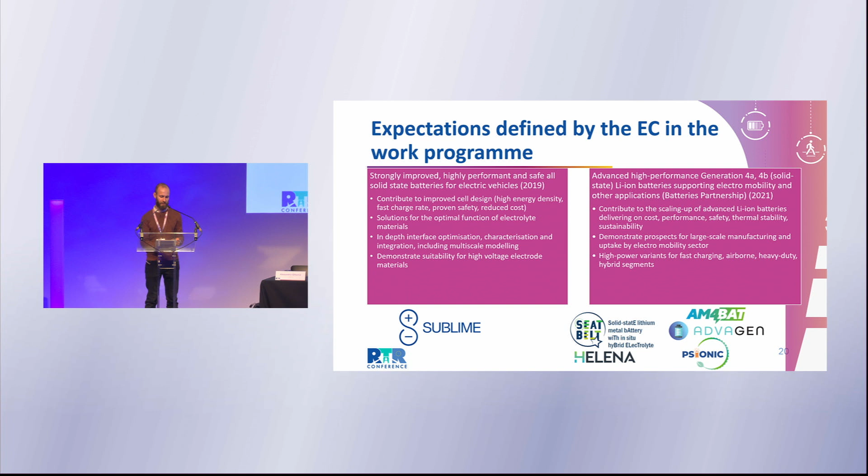There are two topics in particular that address solid-state batteries, one of them being the strongly improved, highly performant and safe all-solid-state batteries for electric vehicles, under which the project SUBLIME was funded. It responds to the needs of the EU for improving the cell design, but also to provide solutions for the optimal function of electrolyte materials, to demonstrate suitability for high voltage electrode materials, and to contribute to interface optimization, characterization, and integration, including multi-scale modeling.

And then there is another topic under Horizon Europe, under which the projects SEATBELT, HELENA, ADVAGEN, and PSIONIC were funded, which aims to advance high-performance generation 4A and 4B all-solid-state lithium-ion batteries, supporting electromobility and other applications. The aim is to improve the design and performance of lithium-ion batteries, delivering on cost, performance, safety, thermal stability, sustainability, but also to demonstrate their potential for the electromobility sector, and to provide high-power variants for the fast-charging, airborne, heavy-duty, and hybrid segments.

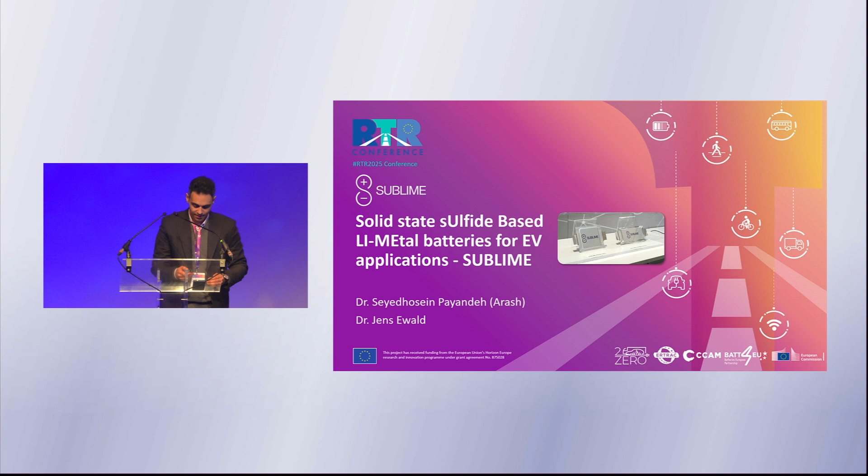There were parties for making materials, parties for fabricating cells, and the automotive industry was also involved at the end to evaluate the cell performance. The aim of this project was to make an all-solid-state battery. It was a very challenging project, starting with high nickel cathode materials, nickel content above 80%, to be compatible with state-of-the-art lithium-ion battery technology, with a lithium metal anode to boost the energy density of the cells, and with a sulfide solid electrolyte.

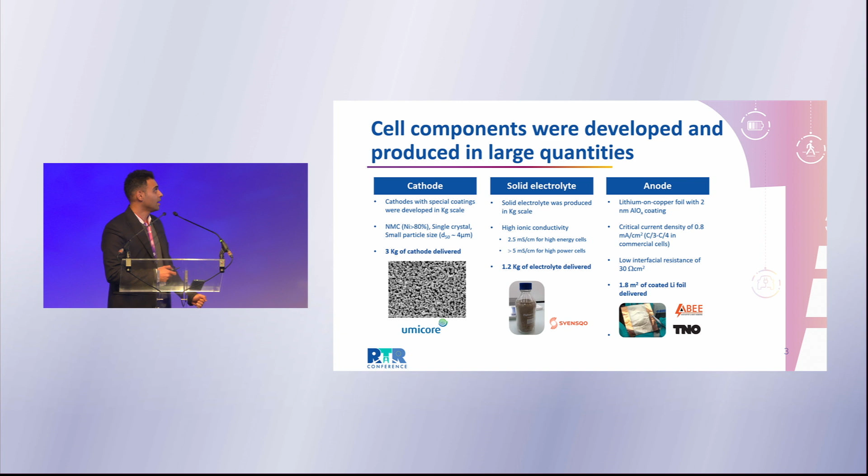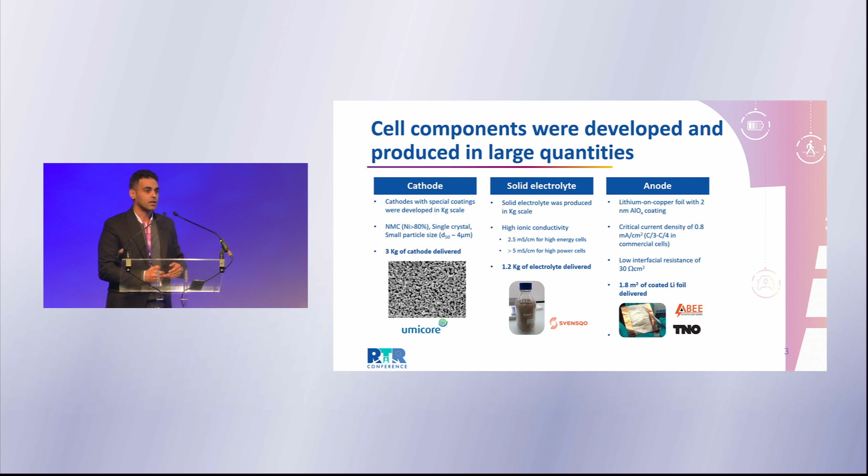So for the anode, because we are using a lithium metal anode, it is very challenging. Our partners, ABEE and TNO, were responsible for making stable coatings to apply on lithium metal anode and make it stable. We deposited a special aluminum oxide on a lithium metal anode, and we went through several iteration steps to optimize this coating, and at the end, our partners could deliver 1.8 square meter of this coating. So this is on a material level.

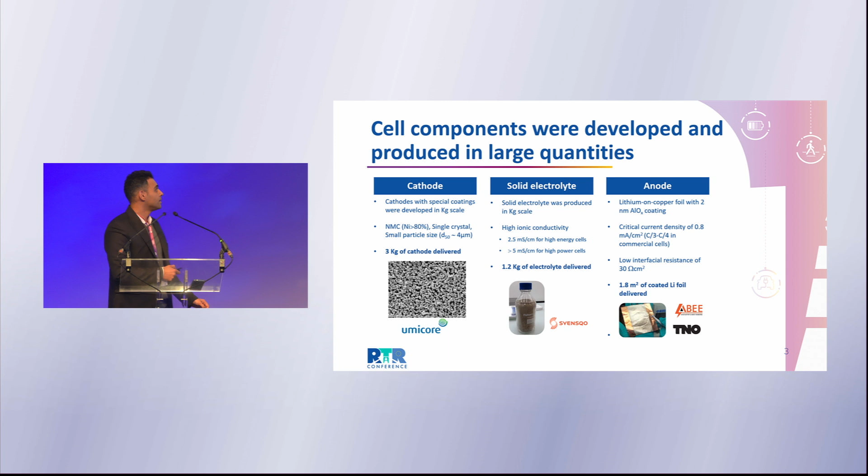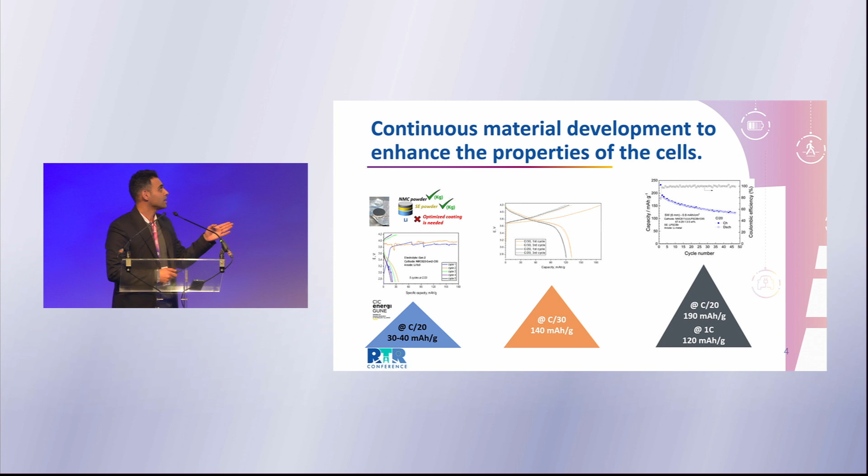This is just an example of how, by tuning our materials, we can improve the performance of the cell. For example, on a coin cell level, this is the performance we had at the very first of the project in the first year, so we could only get 30 to 40 milliampere hour per gram capacity. Then we optimized the material, the capacity improved, and at the end of the project, at the last year, at the coin cell level, we could reach 190 milliampere hour per gram at C/20. And at 1C, we could get 120 milliampere hour per gram.

But the main challenge that we have identified is that the lithium metal anode was considered as the main challenge, because it was very difficult to source lithium metal anode with high quality, and also the coating of this was very challenging.

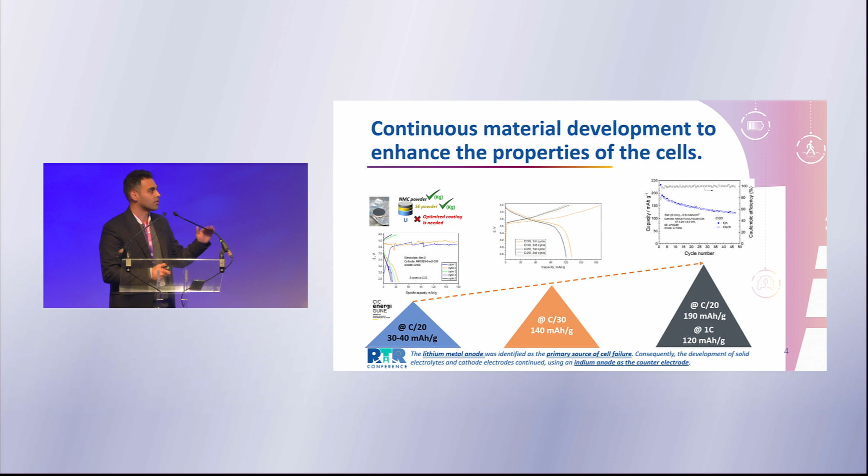So as an intermediate solution, we proceeded to make cells with indium anode. This allows us to fabricate electrodes, cathode electrodes, solid electrolyte layer, and fabricate the first cells with the indium anode. And later, when we have the lithium metal anode, we can fabricate the final cells with the lithium metal anode then.

So it was below our target, of course. However, in these cells, we were focusing on performance rather than just maximizing the energy density, because this was the first generation of the cells and we wanted them to really work.

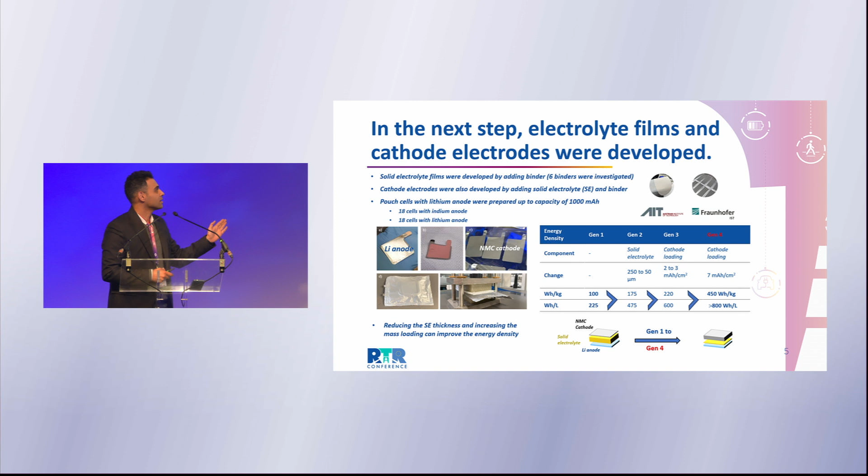The solution to increase the energy density is that in the first generation, the thickness of the solid electrolyte is very high, around 250 microns. So we have to reduce the thickness to at least 50 microns, and we have to increase the cathode loading. As shown in this animation at the bottom, for us the cathode loading was low and the solid electrolyte thickness very high, which resulted in this low energy density. However, in the next generations, we can step by step tune this and reach the final energy density required for this project.

Then we tested the cell. We made 18 cells with indium anode and 18 cells with lithium anode, and then we tested the cells. So for testing, this is the cells with indium anode and lithium anode, you can see both of them.

The cycling performance is stable. However, we can see that the capacity is much reduced, and this is because the process of the electrode needs further optimization, I can say. At the moment we have stable cycling, so we can reach 250 cycles. The cell is working, however in the first step, for the formation, we still lose capacity. This is mainly for the cathodes that we have produced and the lithium metal anode, which are still decomposing a little bit in the first steps of charge and discharge.

Then in the next step, we wanted to measure the thermal stability of the cells, and we did abuse testing. So we made a 1 ampere hour cell, since we needed a large cell that we could rely on for the testing result.

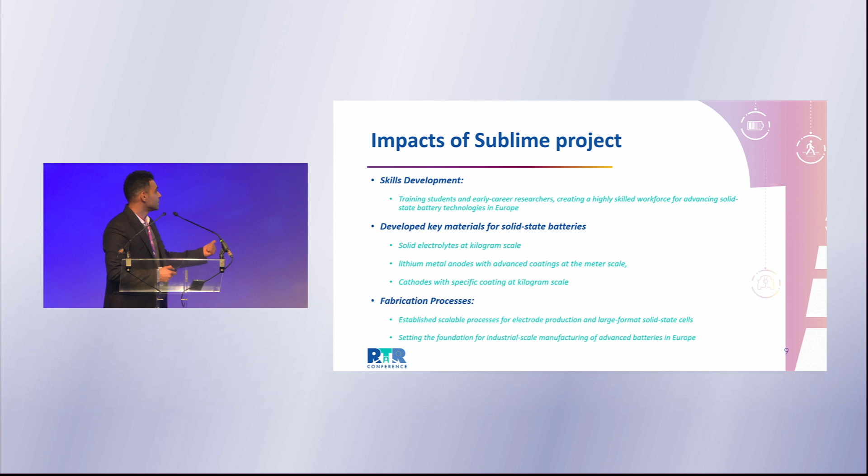So in this project, the impact, quickly going through the impacts: a lot of students were trained, a lot of knowledge was obtained by processing these materials. We developed materials at kilogram scale: solid electrolyte, cathode, lithium metal anode. We fabricated this electrode, and did life cycle analysis. We developed a recycling path with 90% efficiency, and simulation techniques. For example, the final results were presented to the European Materials Modeling Council. And at the end, we published 14 open access publications and presented the results in 23 conferences.

To make it more refreshing, I will be presenting the first part of the project, introducing the goals and the approach that we are following, and then I will leave the word to Sara. She will be more focused on the multi-physics, multi-scale battery modeling approach.

To briefly introduce HELENA project, we started in 2022, and you can see here a picture of the kickoff meeting with all the partners involved in the project. Following on the previous project that was presented on SUBLIME, we have a similar goal as SUBLIME, but a completely different chemistry. But as Aras was saying, there was a very good learning from the SUBLIME project that has allowed most of the partners, which are also part in HELENA, to start from a higher point.

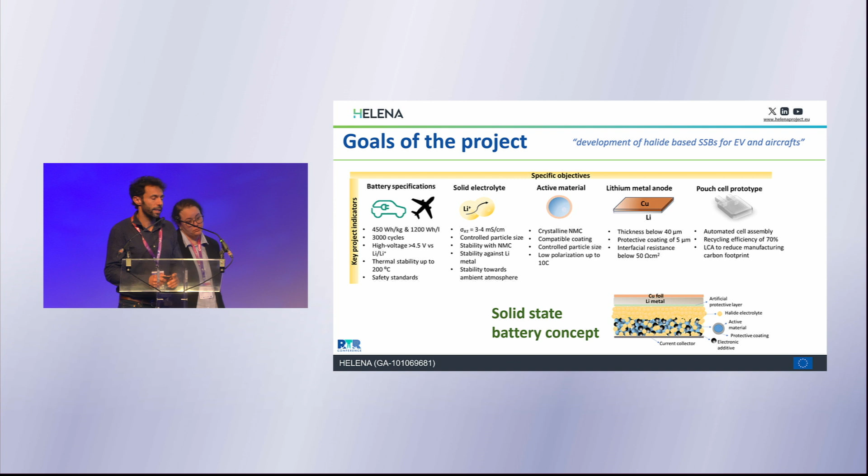And so finally, the goal is to make these prototypes of 10 ampere hours to demonstrate how this chemistry positions on a scenario in which there is still a lot of uncertainty on which solid electrolyte will be the most appropriate.

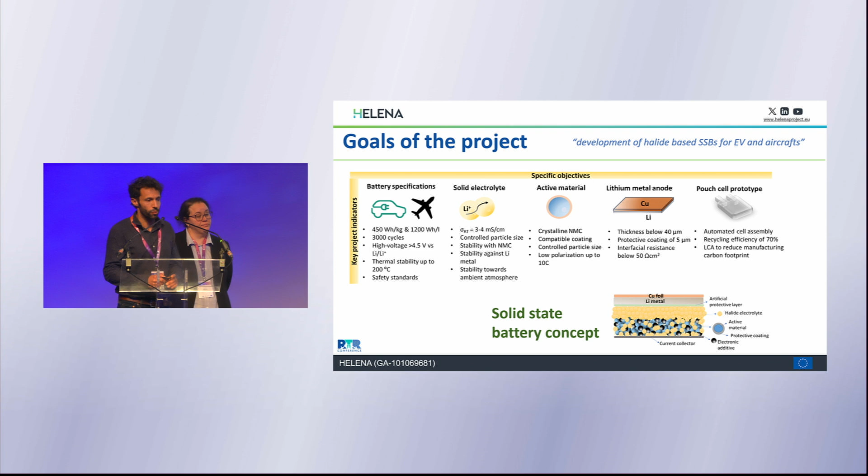And you can also see the solid state cell configuration, where we have these layer schematics of the battery. As an approach for this project, we have 3 main phases. First phase deals with all the materials sourcing, so the fabrication of the solid electrolyte, the development of the cathode, and the lithium metal with the protective coating solutions.

In parallel, there is also an optimization task to really optimize the electronic properties of the halide material, pushing forward the ionic conductivity, the coatings of the active material, and the anode

interfaces. On the second phase and core of the project, and it's where we stand now, we are processing all those materials, raw materials, into battery components. That means the extrusion of the components to prepare the cathode laminates and the self-standing electrolytes. We are aiming for very thin layers of halide electrolyte to reach the energy density that we are targeting.

And finally, on the later phase, we are making these prototypes from a lab cell scale to large pouch cell for final validation in the application with the specifications that are set by the end user. So in this whole phase, there is the transversal activity of the battery modeling, which serves as a guideline to help to make better materials and to build better solid-state batteries.

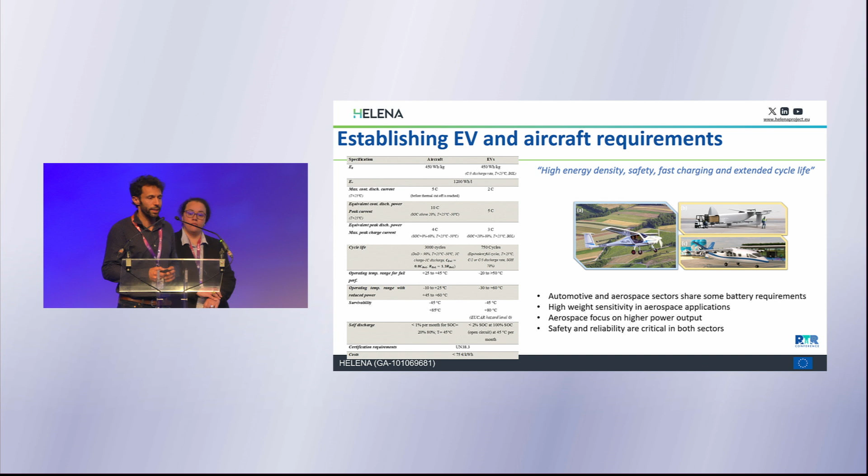However, for the aeronautic application, there is a high weight sensitivity of the battery. And as well, this application requires a higher power output. Of course, for both applications, safety and reliability are very critical.

On the experimental side, there's been a lot of materials optimization. If we take the solid electrolyte as a core material here, our industrial partner has been able to manufacture several generations of this halide electrolyte at a large scale. And with that, they managed to obtain high conductivity material with 5 millisiemens per centimeter, which will ensure, hopefully, the performance at higher rates.

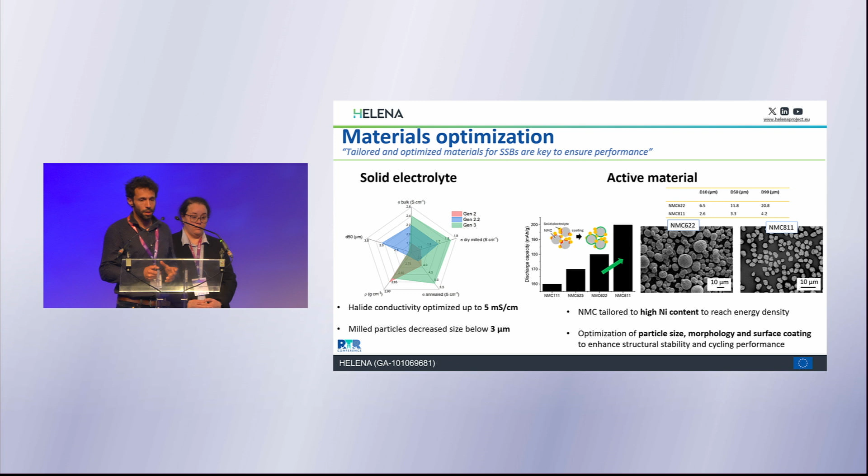And also, as an important property of the material, they managed to decrease and to homogenize the particle size to ensure a good contact between all the materials within the battery. On the side of the active materials, same. There's been also good progress on the two families of NMC that were developed with lower and higher nickel content. So here, what I can say is that we now have NMC rich in nickel, which has been optimized in terms of particle size and surface coating that will ensure the performance of the cells.

We took those materials to process them into components, and for the moment, we already had cells that are being done at lab scale. You will have details on the electrochemical performance in publications that are coming out of this project that will be listed later. And here what I can say is that now we are at the stage of fabricating these self-standing membranes. So we now have thin self-standing membranes of 100 microns, but we are able to decrease further. So hopefully we will reach the target of the project of 30 microns.

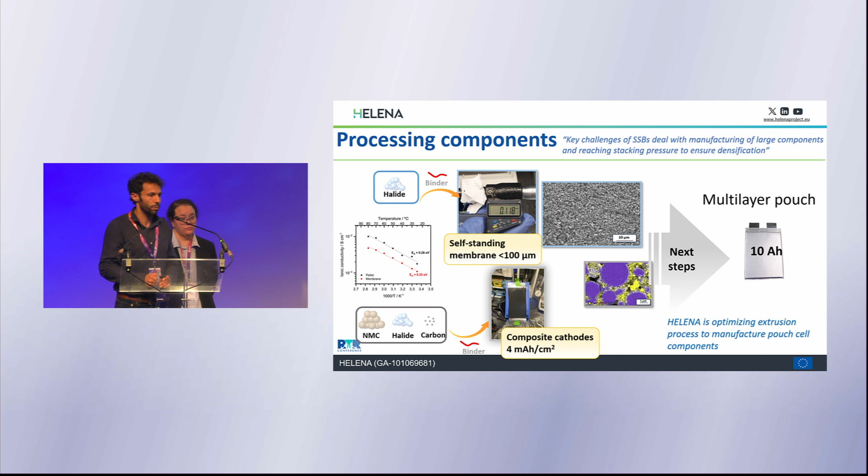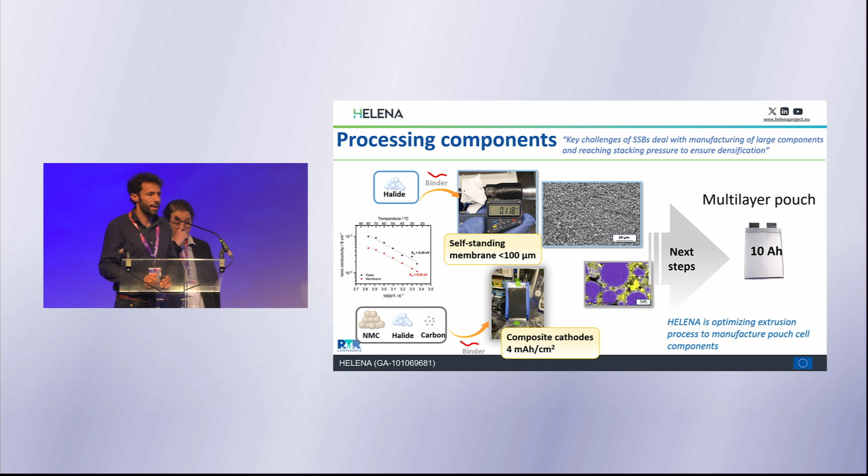In parallel, there is also a lot of work on making the composite cathodes with NMC and the halide. And we are now at the step of making the multi-layer pouch cells. So partners involved in processing with extrusion are now investigating how these materials can be processed.

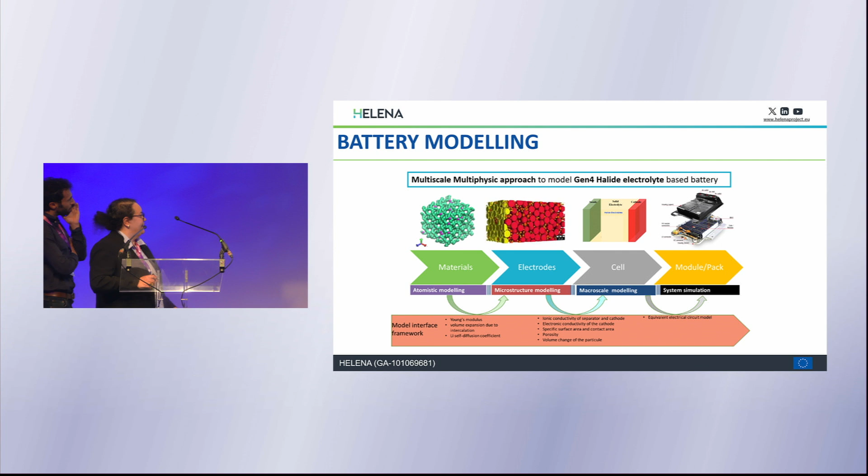At the pack level, we have a simulation system to simulate end-user profiles for both aeronautic and automotive applications. I hope that you trust me if I say that today we don't have one interface or one software to assess all these skills. So the deal is how to connect all these modeling skills, how to identify the input and output of all these models. And in the HELENA project, we defined a framework in which we identified these inputs and outputs. And now we are using this approach to assess the design and the assembly of the cell.

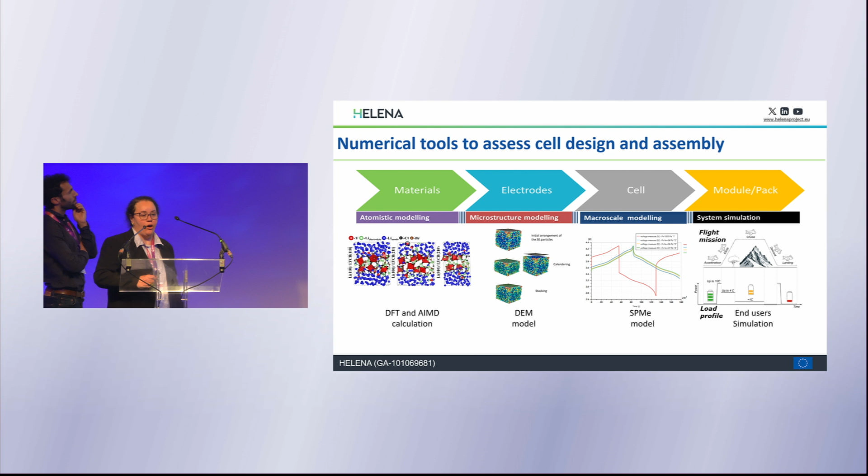At the atomistic modeling, we tested and studied different generations of the solid electrolyte. At the microstructure modeling, we are using a discrete element model to model the stacking and the calendering from an initial arrangement of the SE particles. At the macroscale model, we are using a single particle model, and here we have an example to assess the impact of the external pressure on the performance of the cell. And the idea in the next months is to use and reduce these physics-based models for the system simulation and be able to simulate use cases from both aeronautic and automotive.

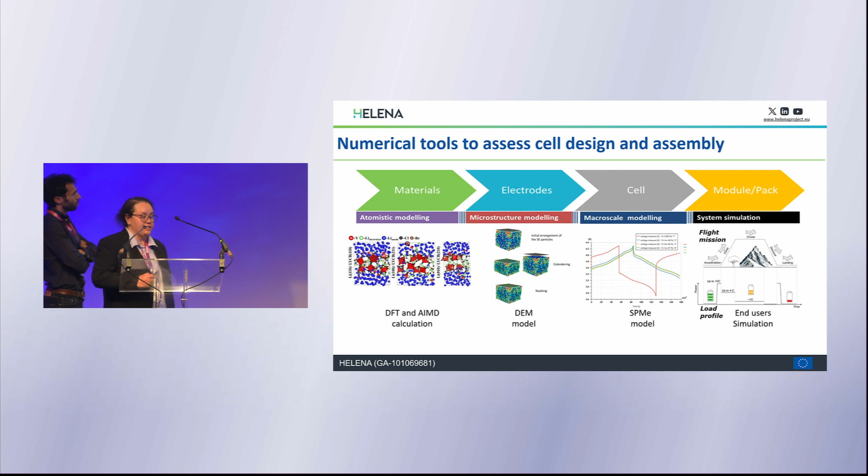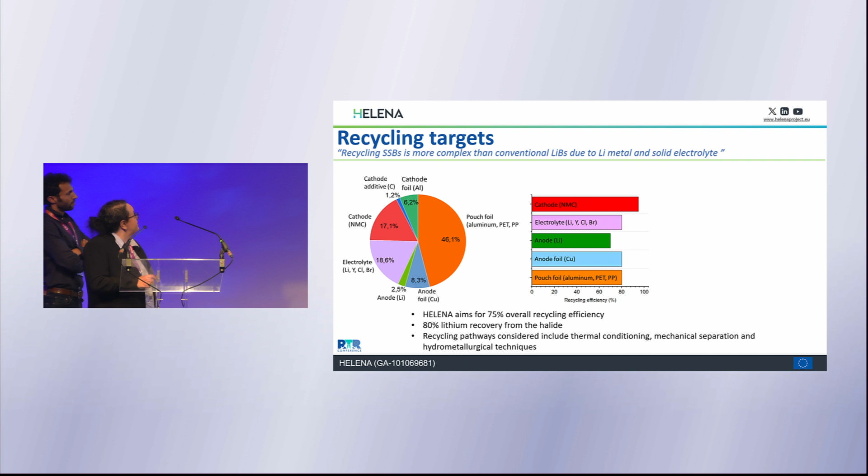We are dealing with the recycling as for the different projects today, and we aim to have 75% recycling efficiency and 80% of lithium recovery from the Halide. And today we are sure that recycling is more complex and challenging with generation 4 compared to commercial lithium. Today we have 2 patents related to the preparation and treatment process of the Halide electrolyte. We disseminate with 2 published articles, 3 submitted, and hopefully in the upcoming months more.

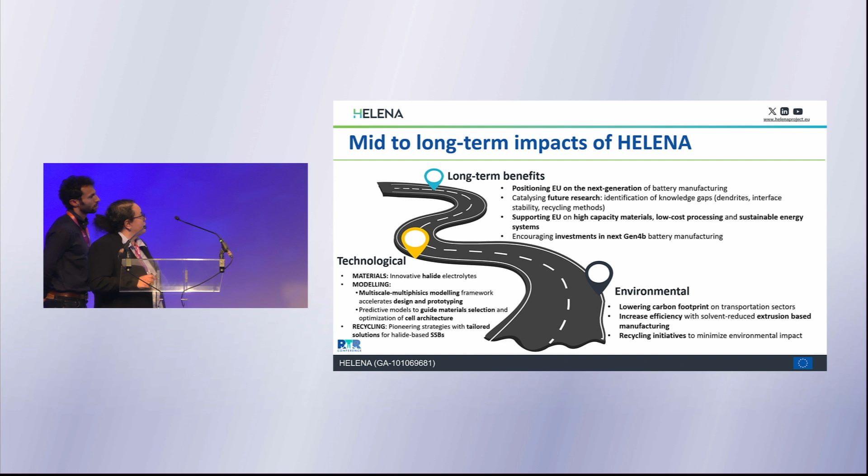And for the impact of the HELENA project, for sure in the technical aspect, we are innovating Halide electrolyte with optimized components for Gen 4B battery. Our approach for modeling is interesting and can be used for further development and other projects. For example, our developed models and the approach are available in the public deliverable. For long-term impact, we believe that we are pushing and encouraging investment in next generation 4B. We are supporting Europe with all these optimized materials, and we hope for future research taking into account all the gaps and challenges that are identified within the project.

Okay, thank you everyone. I'm happy to be here to present our PSIONIC project, which aims at developing a new Gen 4B battery generation. So in PSIONIC, we are a big consortium which covers all the value chain for being able to deliver this new generation of batteries. We coordinate the project together with Clearance, who is helping us on all the, let's say, paperwork, and on the technical side, we take the lead.

There are other partners which are taking care of all the parts of the batteries. For example, for current collector developments, we work with Armor. For developing new polymers, we work with Specific Polymers, Politecnico di Torino, and NIC. We have the help of different groups that are able to make modeling in Uppsala, in Italy also. And for the lithium side, we work strongly with the MEET laboratory in Germany.

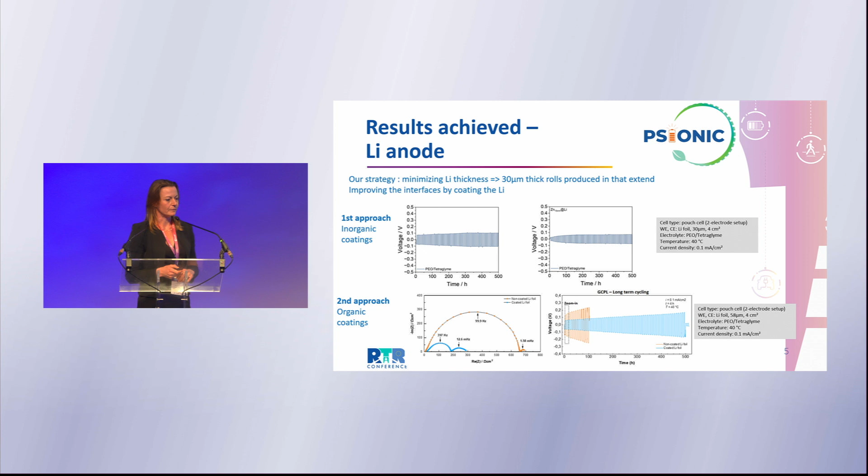On the electrolyte, so as I was saying, we started with the PEO-based electrolyte, but it's not our main goal. So we are trying to improve this electrolyte to make it functional with the NMC electrode and at lower temperature. You all know that PEO cannot work at room temperature, so we are trying to increase, let's say, its conductivity at room temperature.

What was interesting in this project was that we discovered that even with cyclic voltammetric measurements that were good at high potential, still 4.5 volt, when you put the right electrode, it's a completely different world. So our electrolyte was, let's say, stable in theory at 4.5 volt. But when we put it against NMC, it was not functional. So we are currently redeveloping the electrolyte, improving it to make it compatible with NMC and allow it to work in the real system.

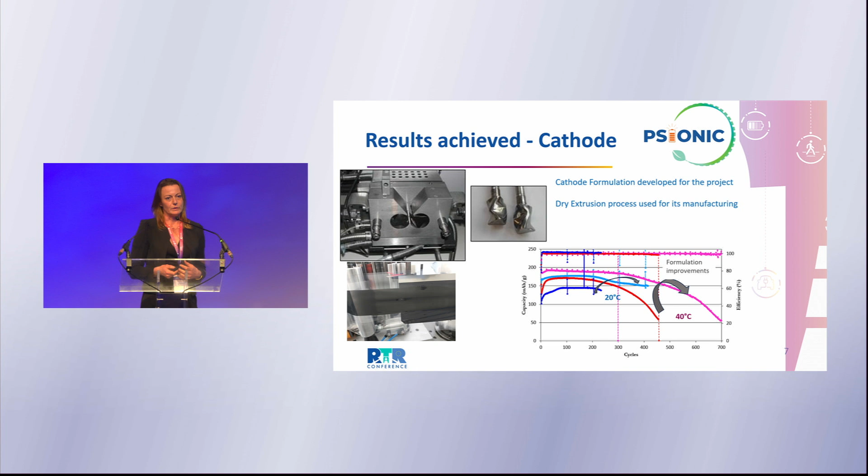So the challenge after was to boost the performances of the cathode part, and this was done, as you can see on the slides. The first results were the red and dark blue ones, and we've tried to improve the performances, and now we get the pink and the light blue ones. So we already get very good cyclabilities at 40 degrees, and we still need to improve it at 20 degrees, but it's ongoing.

We also have a big activity on modelization. Why do we do that? It's in order to, let's say, better understand what is happening both on processing and on the results we got. So we try to model the different interfaces to improve them. So we know that interfaces in the solid-state batteries are crucial for performances. It's not a breakthrough, but now we need to understand deeply what is happening in our system. So we are making modelization on the lithium PEO interface.

We also try to understand the compatibilities and the interactions between the different polymers we will put in the battery. How the PEO transfers its lithium to other polymers, to single-ion polymers that are integrated in the cathode side. And we also try to understand why the active material is more or less compatible with the different polymers. In theory, it's compatible, but in the process, we see that there is not a very good dispersion, why it is happening. And modelization helps us to understand and then go to the lab and try to find solutions.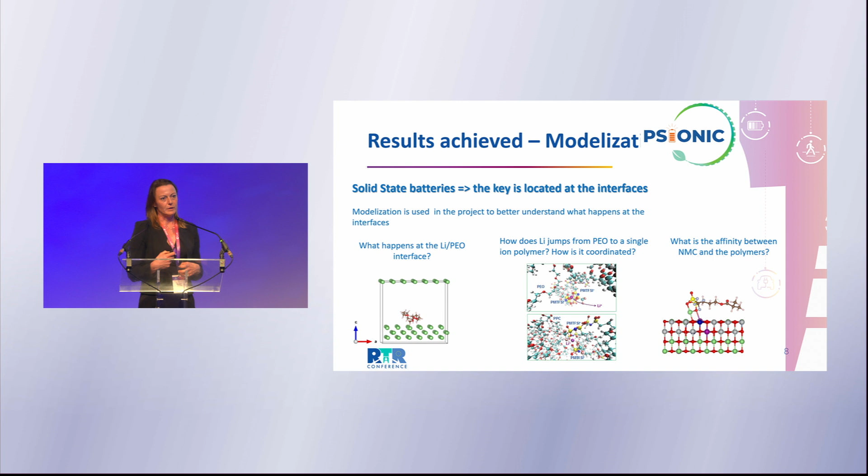We have also, of course, activities in recycling. So in the recycling, let's say that there are two activities. The first one will be to recover lithium metal, and the second one will be to recover all the other components. So for lithium metal, we have the chance to benefit from Blue Solutions expertise, who already have a process in their hand to recover the lithium metal.

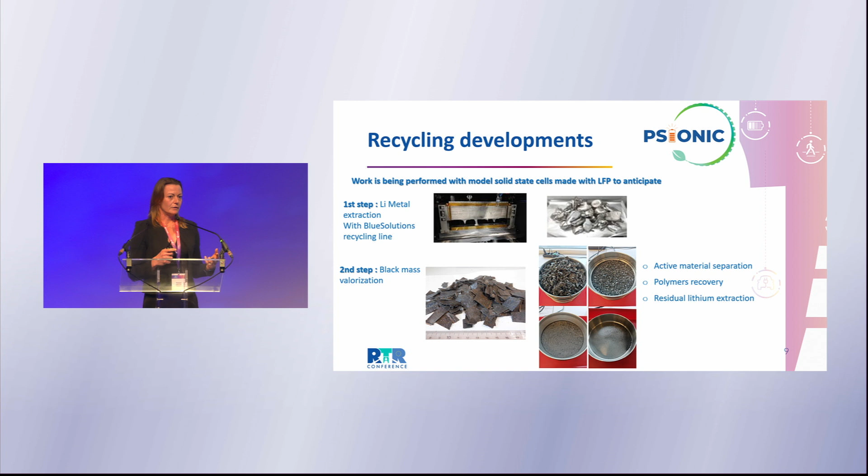So we use this process, and after we work on, let's say, the remaining part, which is like a black mass and really looks like a lithium-ion battery. And currently we are developing all the recycling processes for recovering the polymer, the salts, and all the other components.

So in terms of impacts, what we will deliver are two generations of cells, as I was saying at the beginning. The first generation will reach intermediate KPIs in terms of performances, around 900 watt-hour per liter. And the second generation will fulfill, let's say, all the requirements we want to reach in the project and reach 1,200 watt-hour per liter.

So here you can see, let's say, the details on how we are intending to do that. So to move from 900 to 1,200, we need to work a lot on the lithium metal first. So we will reduce the thickness, but if we only reduce the thickness, you all know that it will never cycle for a long time. So we engineer this lithium metal, we improve the interfaces, we coat it to make it work better.

We also work a lot on the electrolyte. Why? Because we want to also decrease the price of the cell. And to decrease it, we try to incorporate the maximum of low-cost material, for example, PEO, which is very cheap, and reduce the expensive polymers. So from Gen 1 to Gen 2, we will only allocate expensive polymers to the positions where they are absolutely necessary.

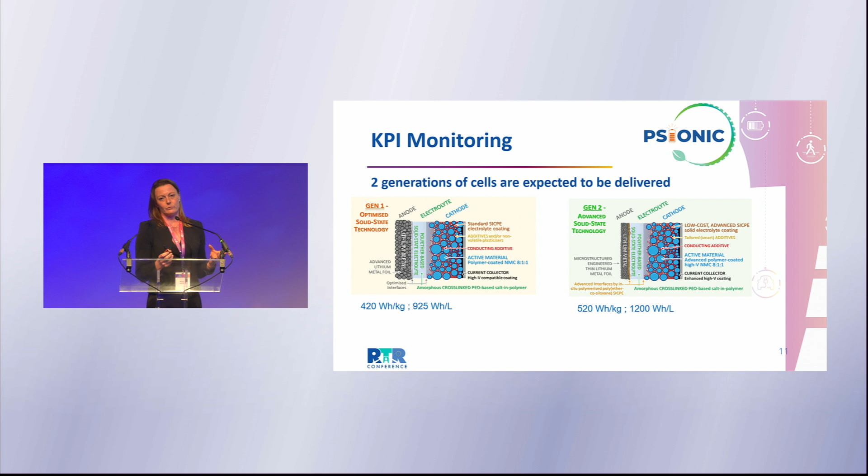So in Gen 1, we put, for example, single-ion polymers everywhere in the cathode, but in Gen 2, we will only coat the active material with the single-ion polymers, for example. And of course, to do that, we need a lot of improvements everywhere to make everything compatible together.

To monitor the results of this project, we are working with Renault to define very good KPIs adapted to the application. So we have defined different ways to test the cells. So we will record different things, ranging from cyclability to power performance tests, but also perform different safety tests to verify that our cells are compatible and integrable in EVs.

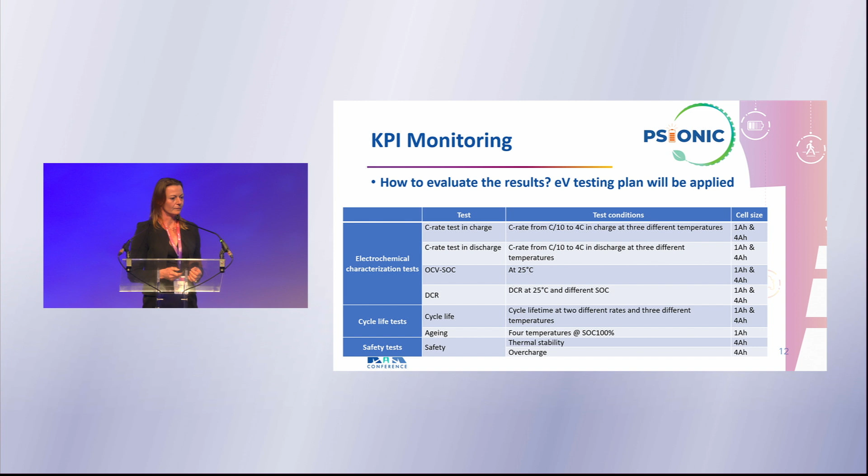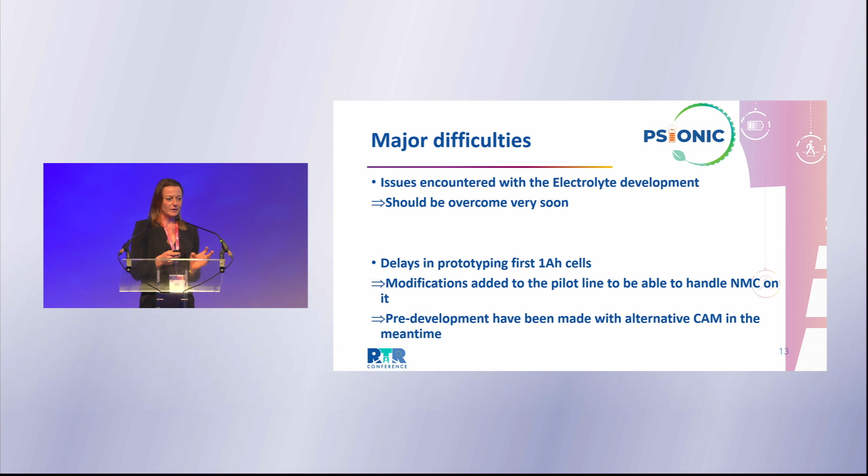Our major difficulties have been to develop the electrolyte, and currently we also face some difficulties in prototyping because, as you know, NMC is very toxic, so we have lost some time before being able to extrude NMC because we needed to implement safety measures in the labs. So we are trying to recover this time and go to prototype just now.

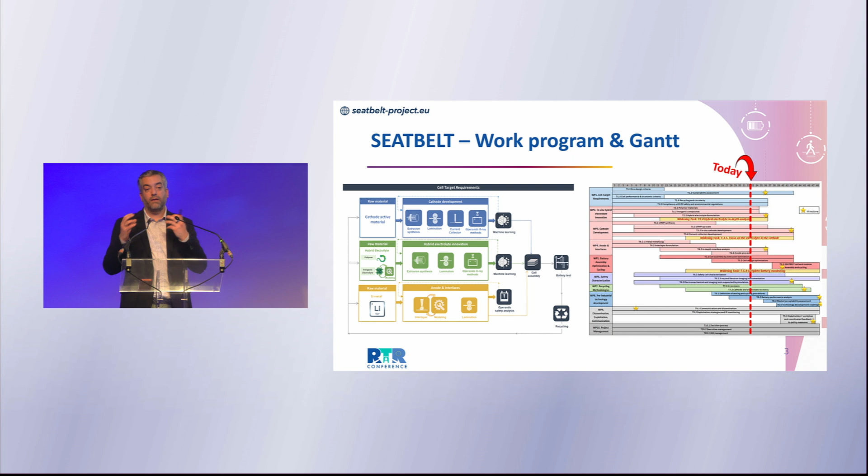For cathode material, we chose lithium manganese iron phosphate, simply because it's low cost. And all that goes together. We have partners doing atomistic modeling and machine learning to help tune the microstructure of the electrodes and the electrolytes. The goal is to have cell assembly, and in parallel, we have a strong activity in recycling and safety analysis. We decided, in parallel to the development of the different generations of material, to know the recycling capabilities of each material independently, and then we bring them all together little by little up to the battery cell.

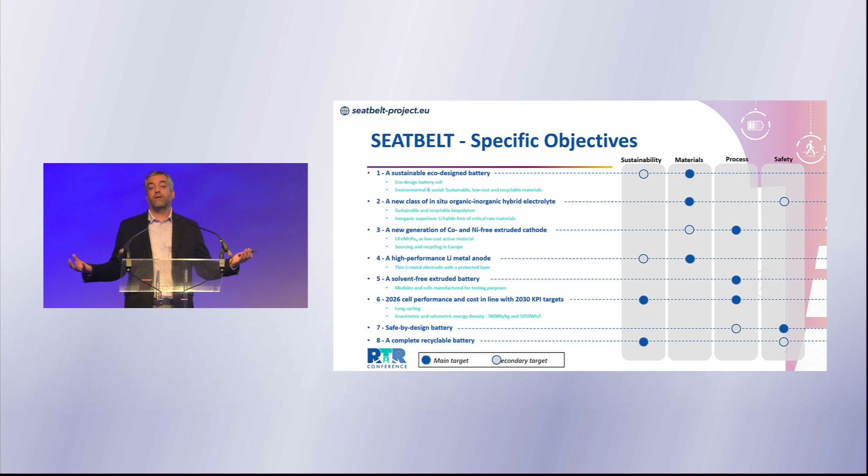SEATBELT is decomposed into different specific objectives. Our starting and driving route is eco-design of the battery, and all those specific objectives fall into 4 different categories: sustainability, materials, process, and safety. These eco-design guidelines help us know what kind of material is suitable to be integrated in the battery system, taking into account recyclability, sustainability, and production in Europe.

We are moving to develop an in-situ hybrid electrolyte based on a biopolymer, coupling that with Halide electrolytes, because it's a ductile material as presented in the HELENA project. Why is ductile an interesting property? Because it helps reduce the pressure of the final pouch cells you get at the end.

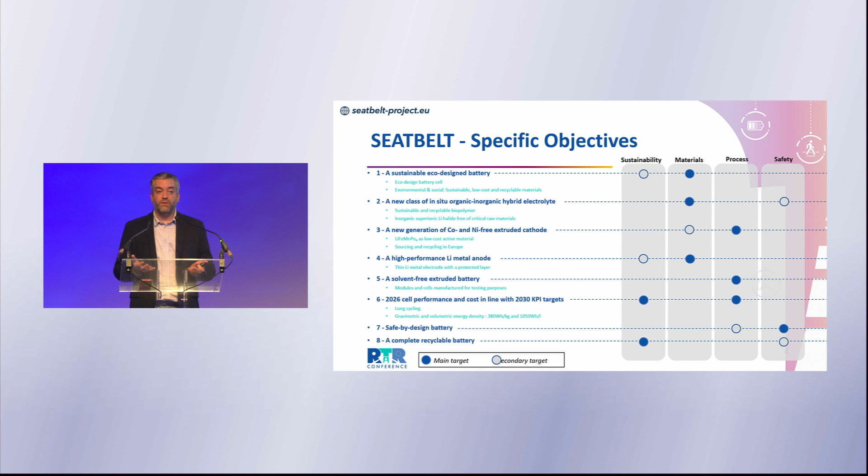LMFP is our material of choice for cathode active material. It's not like NMC, but it gives good cyclability and decent energy density. For lithium metal, this is the main challenging aspect of such projects, not only SEATBELT - to be as thin as possible and compatible with the other materials present. For production manufacturing, we also chose extrusion, which is a solvent-free process, to be in line with the safety and recyclability KPIs of the project.

In terms of dissemination, just a quick snapshot of SEATBELT: we have 1 patent with 2 more coming, a couple of publications, and conference activities. I want to point out two things. First, we are sponsoring some scientific conferences, and we are going to co-organize an international conference on polymer electrolytes next year.

In 2 weeks we will have a workshop, a winter school if you want, on electrochemistry, where we will get about 100 attendees - postdocs, PhD students, and so on - all coming to Grenoble, to disseminate the results of the project and give seminars on the next generation of battery systems.

In terms of results, I want to show you some snapshots. What is driving us is eco-design. The main takeaway is that we started from eco-design, which gives us guidelines in terms of material, then we were able to develop an ideal battery cell - in terms of thickness of the different materials, loading of the cathode, etc. - in order to reach the KPIs of the project, as well as go to the recycling part and think of safety, then come back to the cell development.

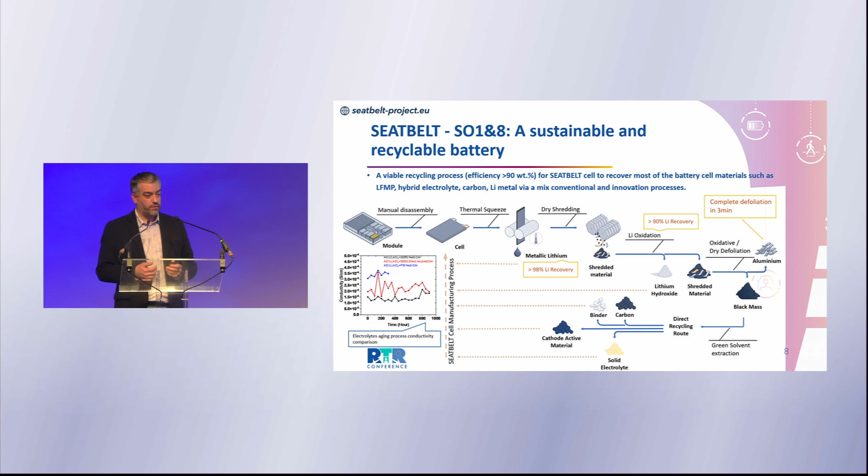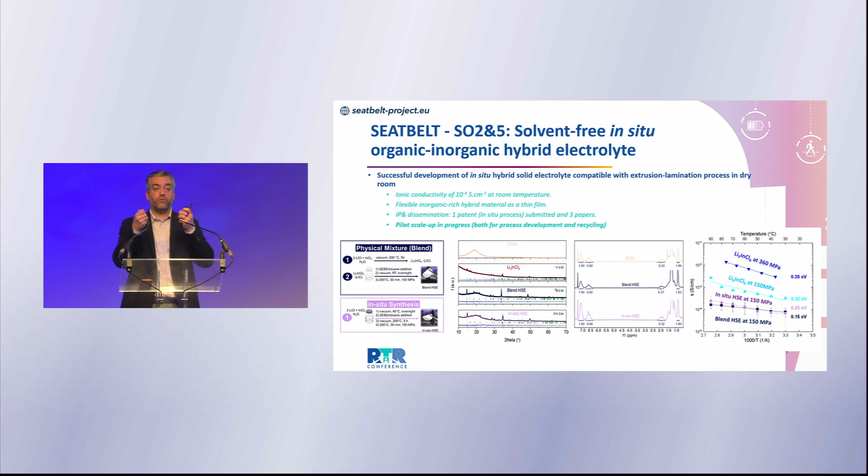I was talking about an in-situ hybrid electrolyte. Why in situ? Usually with hybrid materials, you think of a self-standing film with a dispersion of inorganic material in a polymer phase. Here, we take an organic phase and blend it with precursors of inorganic materials, and using the correct temperature and pressure settings, we can form the inorganic phase within the volume of the polymer to have a co-continuous phase. This helps reduce issues related to grain boundaries within the materials.

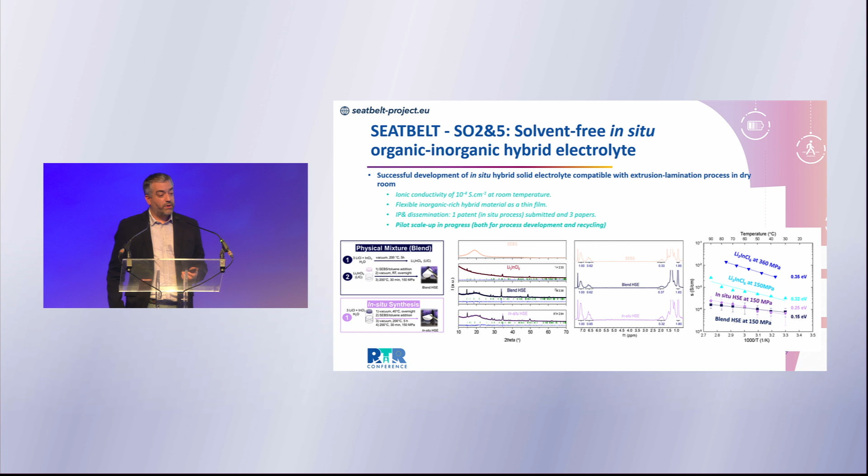The process is compatible with dry room conditions and with the technological development at our industrial partners. We are now capable of scaling up these electrolytes a little. The concept has been patented, and we are getting conductivity that is very interesting and similar to conventional ex-situ mixing.

So the bottleneck for all this next generation of solid-state battery is basically lithium metal. We want to make it functioning.

As PSIONIC project presenting, we benchmark a couple of interlayers, mainly inorganic, and also we have a partner, CRM in Belgium, who is developing by evaporation thin lithium metal, and we are comparing that at lab scale, notably, with thick, dense lithium metal. This helps us to play with either the rugosity, the thickness of the lithium metal, or any porosity effect. Using some electrochemical methodology, we found out that we are capable to process 10 micrometer thick lithium metal with correct cyclability.

What is interesting in our recent development is that we reach one of the KPIs of the project, because at room temperature, we reach a cyclability capacity of 2 milliamp hours per square centimeter.

Results then obtained at lab scale, and now the challenge is to go to pilot scale and confirm all these results. For battery monitoring, we have an additional partner who knows a lot about X-ray, and now we are assembling batteries at lab scale and monitoring the behavior of each material and interface while the current is pulled through the battery. We are also doing some imaging in order to guide us to select the correct formulation and material that at the end will go into the battery.

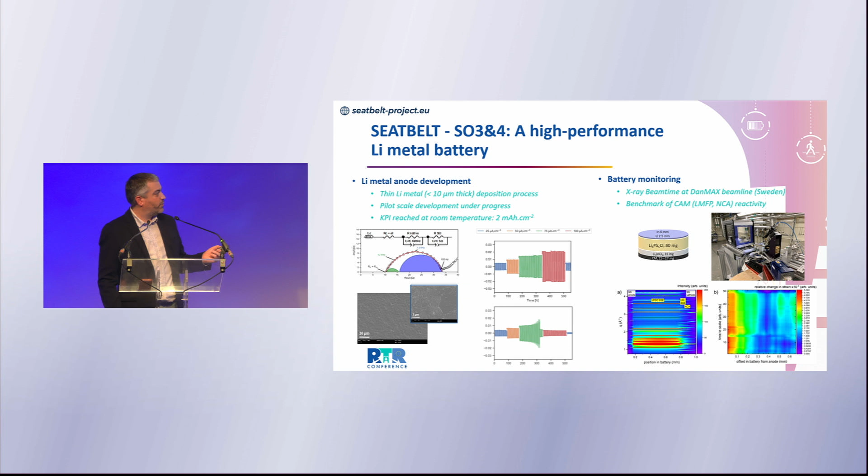The object we need at the end of the day is also a safe battery. Of course, you want to talk about materials, you want to talk about cost, but the consumer will be able to take and use this battery only if he knows that it is safe.

For that, we are developing a new methodology related to safety, and we took advantage of the consortium - we have CINEA and ILL, plus CNRS - and we developed a kind of methodology using neutron imaging. Why neutron? Because neutron is very sensitive to lithium metal, so we can really image lithium metal during a thermal runaway experiment, and this has been done successfully dozens of times at ILL.

Basically what we are provoking is melting the lithium metal and looking at where the failures are, and what lithium metal melting can induce in terms of failures to the subsequent materials - is there onset of reaction, etc. So here, the so-called tour de force of this experiment is that with a very fast camera, we are able to capture the lithium metal and the degradation of the battery.

So now that the methodology is set, we are going to disseminate the results in an open access scientific paper. In 2 months, we are going to benchmark the different configurations of the battery system related to the SEATBELT project. I had a video on the left.

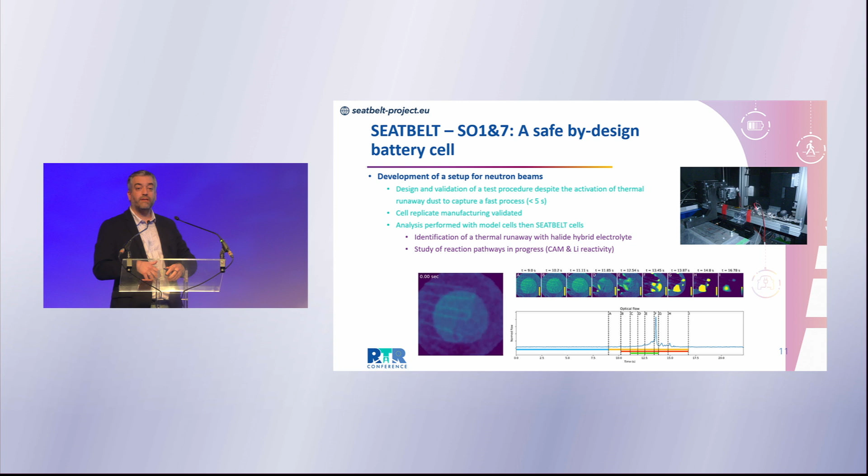I don't know if it's going to work, but anyway, what is important is to show you that we can pinpoint at dozens of micrometer scale the location of the different issues in a time frame below 5 seconds. Overall it's 5 seconds, but we are below milliseconds in terms of acquisition. So it's a lot of work in terms of data management and data treatment as well.

Mid to long-term impact of the project - we have a couple of expected impacts. As I wanted to show you, we want to be able to recycle 90% of the battery and battery materials and to be able to reintegrate that in a new battery system, which is under progress.

It should be so affordable. I didn't mention that our LMFP is now being upscaled at the kilogram scale, so we are quite happy about that and going to integrate that into the battery system. We are cycling so far at lab scale, and we are going to produce the first pouch cells in a couple of months now.

The biopolymer, which is the organic phase of our electrolyte, is known to be recyclable and low cost, and this is also being upscaled right now by our partners in Spain. The Halide electrolyte has now been selected to move on, and the overall hybrid electrolyte is being produced in a dry room at pilot scale now and being already direct recycled at lab scale.

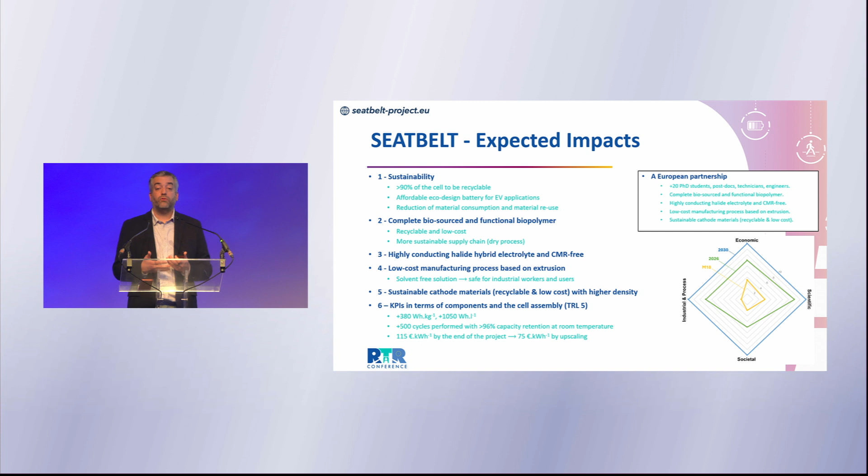What is important also is to know that in terms of manufacturing, we choose a solvent-free process because it's not only safer for the user, but as well for the industrial worker later on in industry. And obviously, we are continuing and pushing to reach the KPIs of the project.

So in terms of exploitation plan, we have a couple of generations of different materials that are now being taken up by different partners of the project, and we are building our exploitation plan, and we'll see what we can get out of that. More importantly, I would like to thank you for your attention.

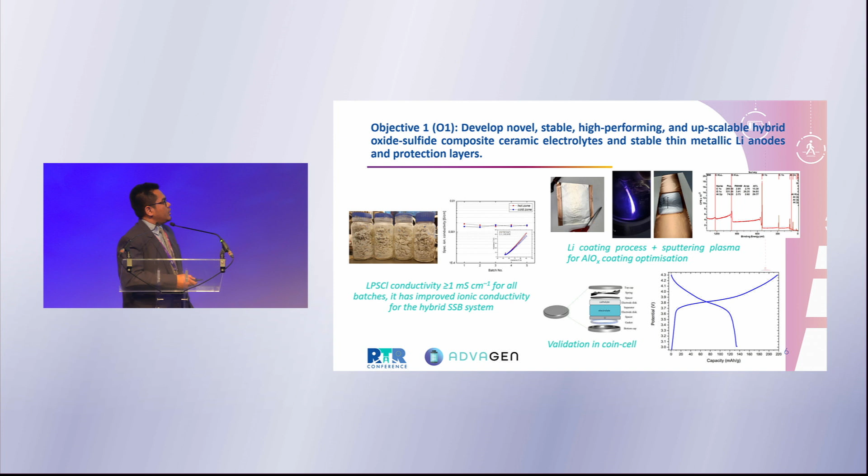For the lithium coating process, we try sputtering first with AlOx coating optimization, getting several nanometers of aluminum oxide, which is already proved by XPS as well. We can validate this in coin cells at room temperature, getting around 130 milliampere hours per gram.

The next objective is trials for cathode layer manufacturing at upscaling stage. Previously we tried in the coin cell and got quite high capacity, but for cathode layer manufacturing at higher capacity - multilayer, we have 1 ampere hour and 10 ampere hour - we need to optimize again. Because while we can use a pellet or a simple way to make solid state electrolyte in the coin cell, for pouch cells of 1 to 10 ampere hour we cannot use the same method.

So we have to tailor again based on the insight in the coin cell, then we can try to make, okay, the ratio is fixed, then we can mix with some other solvent and etc. Because here the tricky thing is sulfide is not that easy to mix with usual solvent, so we need to find the best solvent to mix as well.

And this is the formulation that we use here. We try from 60% to higher, of course, and LPSCl and LLZO, you can find the ratio in our publication later, in the range of 10 to 90, 20 to 80, then we try as well 30 to 70.

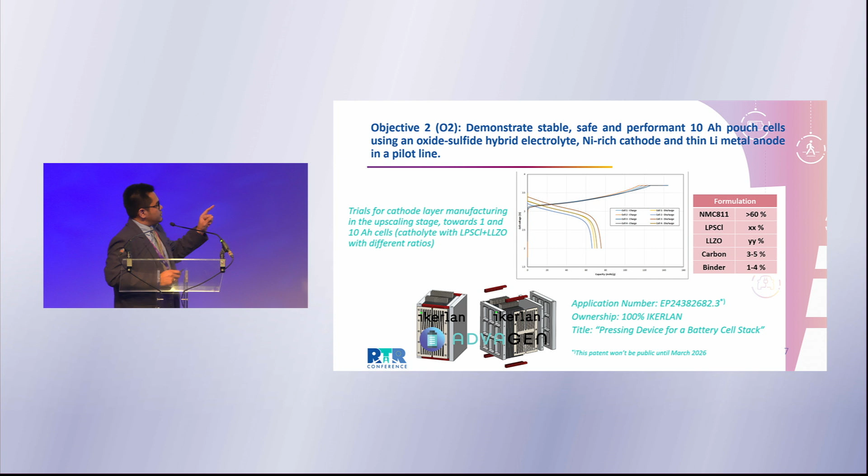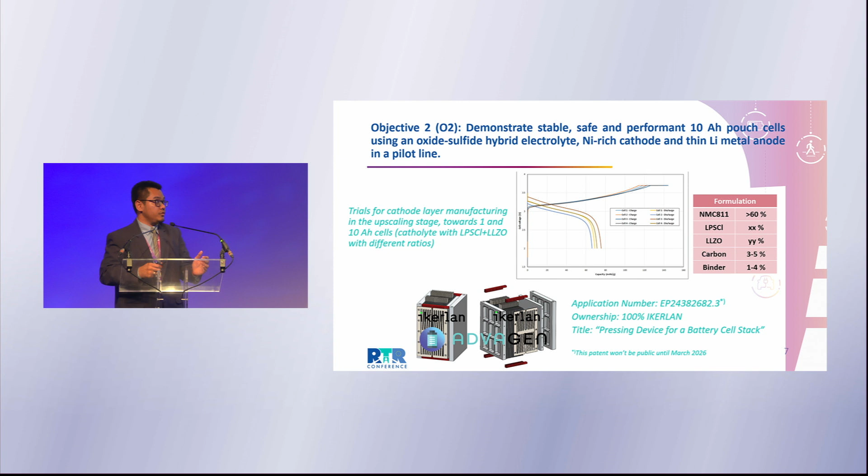But in the future, there are some trials and also modeling, in which in this module there is no spring or any other additional pressure that makes this module push the pouch cell. So we only rely on the materials on the side of the module, where we can have some alternatives like steel and titanium. So we will try to find the good model for that.

And with the next objective here, like already mentioned by previous projects as well, we need to know about battery manufacturing from the technical side. Of course, we have to know what happens during charge and discharge, during the electrochemistry. So that's why IREC got approval for synchrotron beam time in ALBA-NOTOS, and we settled the collaboration with the ADVAGEN project.

So there are several results already. Currently, we are preparing several publications for this, and we try to achieve some additional experiments as well. So that's why we cannot put them here. Maybe later, if we're invited again for the next RTR conference 2026, we can show. And the techniques we use in this operando characterization are XRD, XAS synchrotron, Raman, TXRS synchrotron, and ellipsometry.

And the next objective, we try to align with the European regulation, especially the battery regulation, that in recycling we need to recover the lithium, cobalt, nickel, copper, which makes sense because mostly the European battery industry still relies on raw materials coming from, let's say, Asia. Then how to make Europe not dependent anymore on Asia. Now we still get all the batteries coming to Europe, but later we need to be independent, we need recycling, then we can use sources from inside.

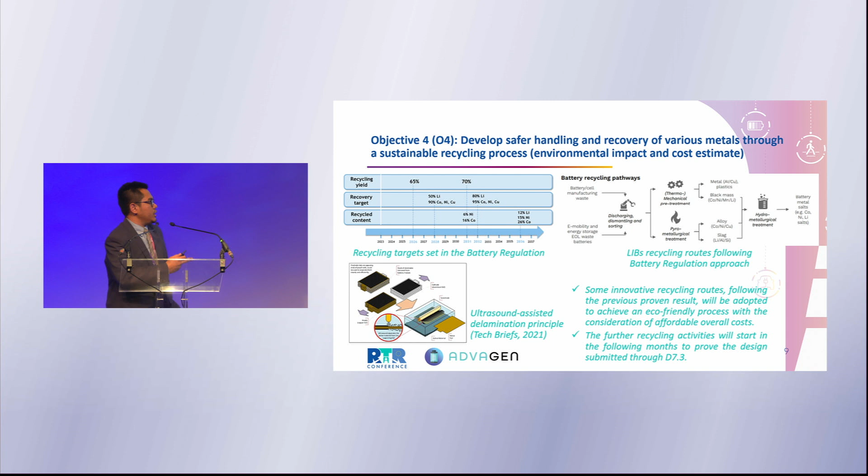And this is more or less the method that we can use, the ultrasound assisted delamination principle, the concept we try to put in the lab scale, it's already running. With the battery recycling pathway, we have several concepts using a thermomechanical pretreatment, pyrometallurgical pretreatment, and in the end, a hydrometallurgical treatment to get the battery metal salts like cobalt, nickel, lithium salts. The further recycling activities will start in the following months, to prove the design already submitted in the deliverable.

And I try to highlight here the next objective, which is we need strong collaboration with the battery industry, battery community. That was initiated by the SPINMATE project, since SPINMATE and ADVAGEN are coordinated by Avesta. So here I also try to manage with the Solid4B project. The first consisted of maybe only 7: SPINMATE, ADVAGEN, AM4BAT, Hidden, POSLion, and SEATBELT. Then several months ago, we started with PSIONIC as well. And recently, we collaborate with the SOLVE project.

So that's the arrangement of the lab-to-market approach in ADVAGEN as well. We will try to collaborate with other Solid4B projects, because in the Solid4B cluster we have regular meetings, once every 3 to 4 months. And by the end of this month, we have another meeting where we want to have a workshop with these cluster partners about IPR management and standardization, and sharing between all of these projects. And this is the mid to long-term expected impacts from scientific, technology, and industrial. This is more or less our path from January 2024.

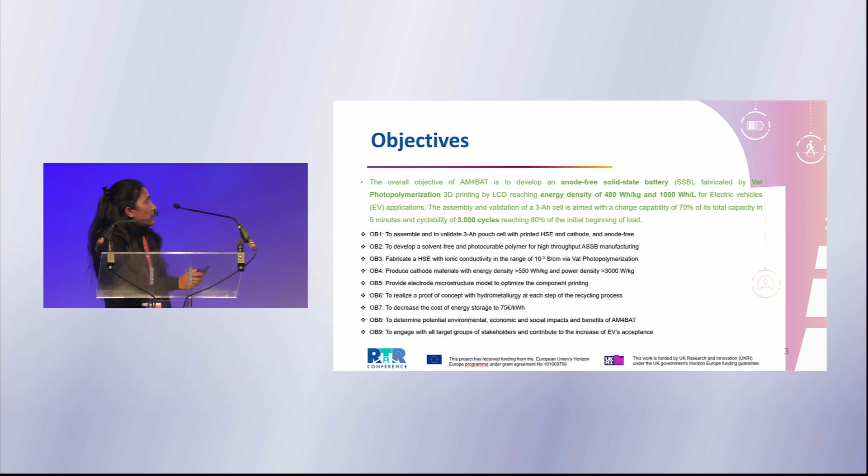And the cathode materials which we propose in this project are aimed to achieve high energy density and power density. And we will also be focusing on recycling and other social impacts of this project. So I'll be mostly talking today about the component developments in terms of electrolyte and cathode, and the development we have achieved so far in this project.

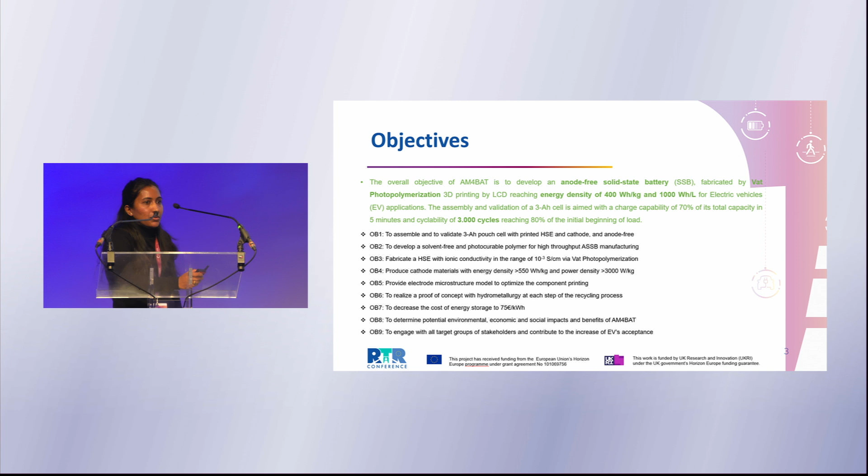To briefly give you an overview of the status of this AM4BAT project, we are already in month 32, and it consists of 9 different work packages. Work package 2 is mostly to specify the end user applications. Work packages 3, 4, and 5 are mostly dedicated to component development. Work package 3 is for solid electrolytes, 4 is cathode development, and 5 is current collector tailoring.

And work package 4 is led by AIT, where we will be validating the cathode composite materials in the pouch cell and also at the cell level. Work package 6 is dedicated to modeling simulations, where we will go back and forth comparing experiments with the modeling. And 7 will come into the picture next year, where we will go for the prototype

and prototype 3-Ah cell validations. Work package 8 is for sustainability impact assessments of this project, like what materials we are using. And work package 9 is dedicated to the dissemination of this project. So today I will be giving a brief overview of the development of 2 components, electrolyte and cathode materials, from this project.

This project started with the... how to go back? No, I think this is fine. No, this is fine, thank you.

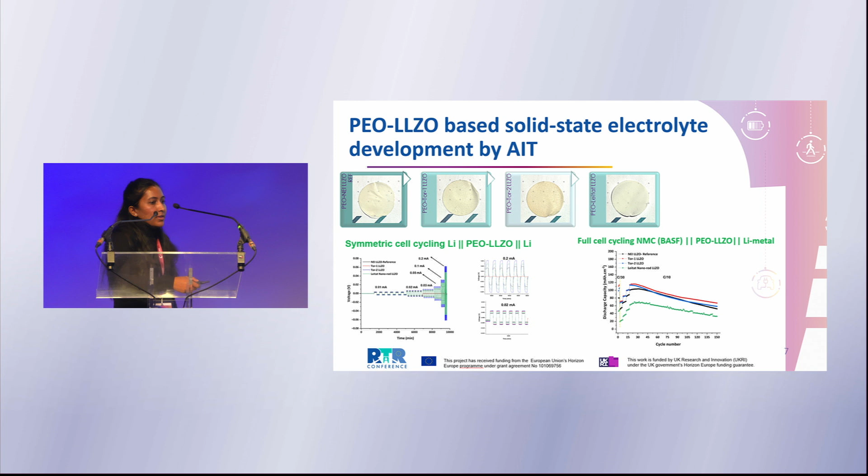And here you can see all the materials reached the cutoff voltage of 4.2, which is the voltage window of the NMC. And at around C/10, we had a very stable cycling for almost all the LLZO particles prepared. And interestingly, the LLZO particles prepared in the project show really good performance compared to even commercial LLZO reference material. So we are still confident that these fillers can go for the further development of photopolymer electrolytes to achieve the end goal of this project.

So this is the main focus of the project, where we are developing photopolymer by one of the partners, Photocentric from the UK. They are very well experienced in developing UV curable technologies. So here they have varied different solvents and polymers and photoinitiators with the starting material LLZO, and they have developed very thin material, and they could achieve a thickness of less than 150, which they're still working on to reduce even more to achieve really good compactability and also improve the energy density of this particular material. And the conductivity achieved so far for this main electrolyte is 10⁻³ at room temperature.

And again, this cell was tested with commercial NMC and lithium metal. As you can see, the performance is still promising, which is more than 120, which is really good performance for state-of-the-art electrolyte materials.

So the next step of this project focuses on the development of cathode and catholyte formulations, which is led by three different partners. And here the cathode material is developed in the project, not bought commercially. So to develop the most surface contact with the solid polymer electrolytes, all the cathode materials prepared in this particular project were coated by different binders, and you can see the performance also. The uncoated material is lower compared to the coated materials.

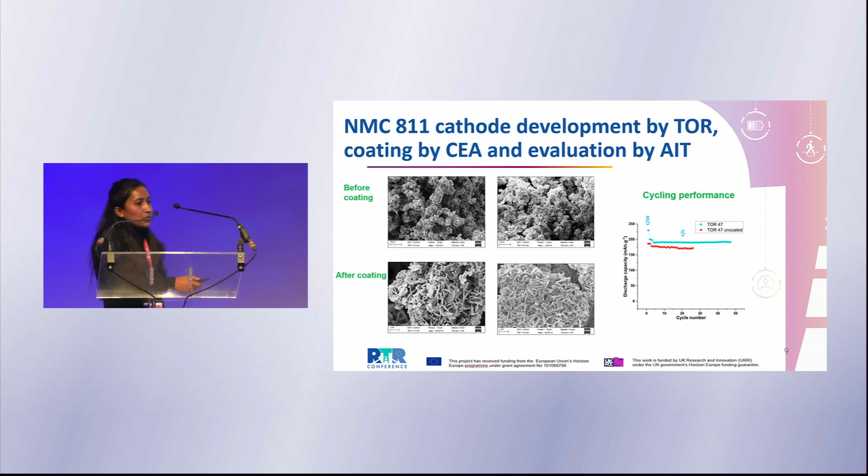So these coated NMC materials prepared in-house in the project will be going further for the photocurable catholyte formulations, which is led by Photocentric. So they are doing in parallel the testing of NMC with commercial NMC, to see if they can photocure or not, and they have already tested with liquid electrolytes to make the validation, and further it will be tested on the solid-state electrolytes.

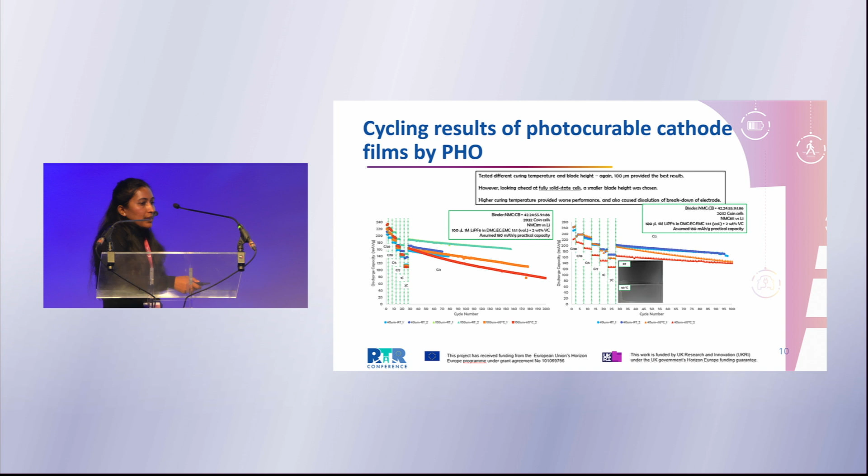Here actually the partners are focused on optimizing different temperatures and the blade heights for the UV curable photopolymerizable cathode materials, and they have tested rate capability at different C rates, and they could achieve really good capacity almost up to the commercial electrodes, even after the photocuring and addition of different materials. So it's going in a good direction, I would say, compared to other NMC materials with other kinds of solid-state electrolytes. Given the challenges in this particular project, it's still going really well in terms of capacity and achieving most of the KPIs.

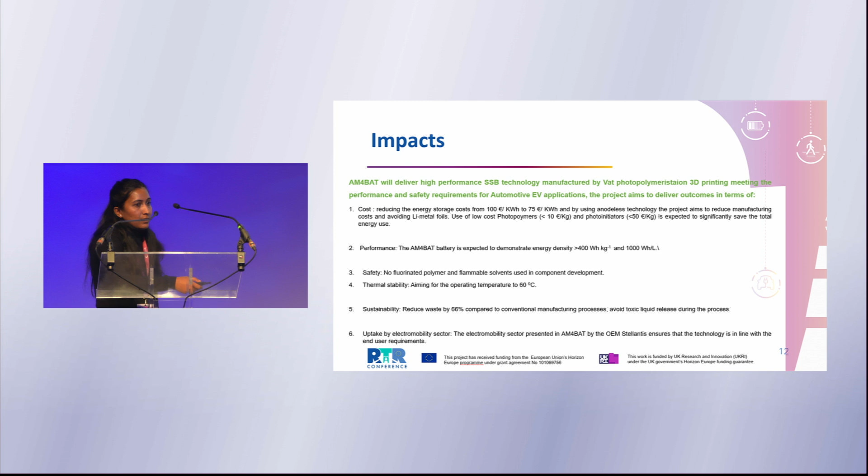And safety-wise, we are happy that we are not using any fluorinated polymers, which are receiving very high attention at this stage because they cause more environmental impact, and we are not using any flammable solvents. And for the thermal stability of the final battery, we are aiming to reach up to 60 degrees to ensure the safe cyclability of the battery.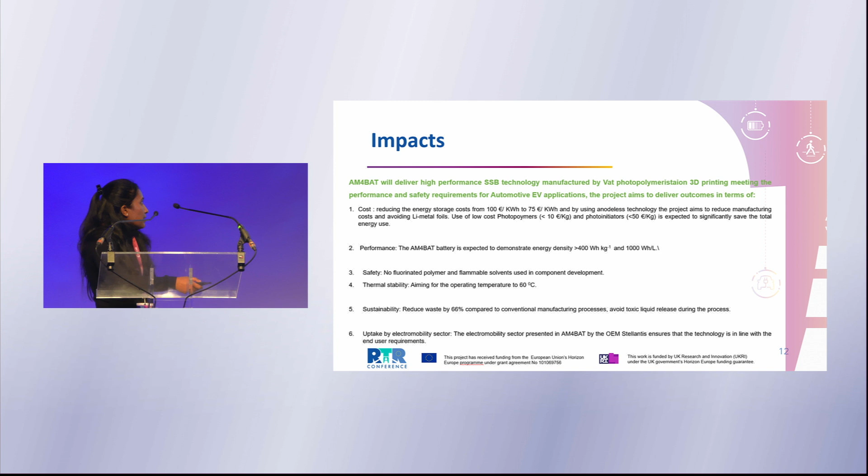And in terms of sustainability, we are aiming to reduce the waste by 66% compared to conventional manufacturing and avoid toxic liquid releases. And the stakeholders are predicting this technology can be used in line with the EV manufacturing industries.